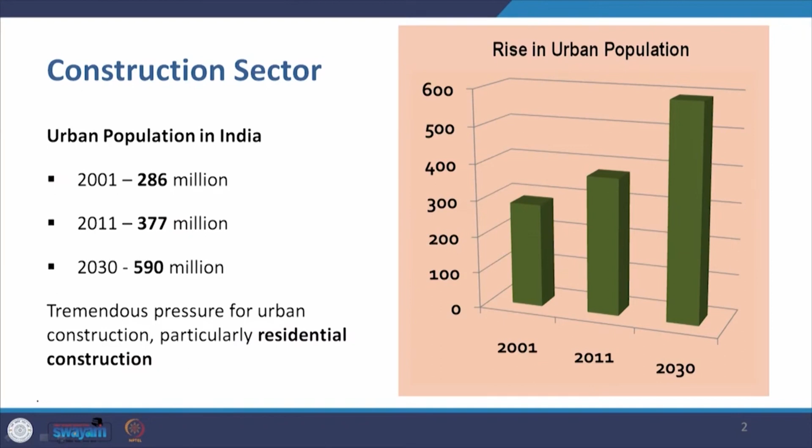The same thing happened from the time industrialization set in, that there was a movement from land to cities, to urban areas, and this momentum has only increased as time has passed. For example, in India, the urban population in 2001 was 286 million or 28.6 crore people, and this is going to shoot up to around 59 crore or 590 million people by 2030. There will be at that point approximately 40% of our population. Tremendous pressure is coming on urban construction, particularly residential construction.

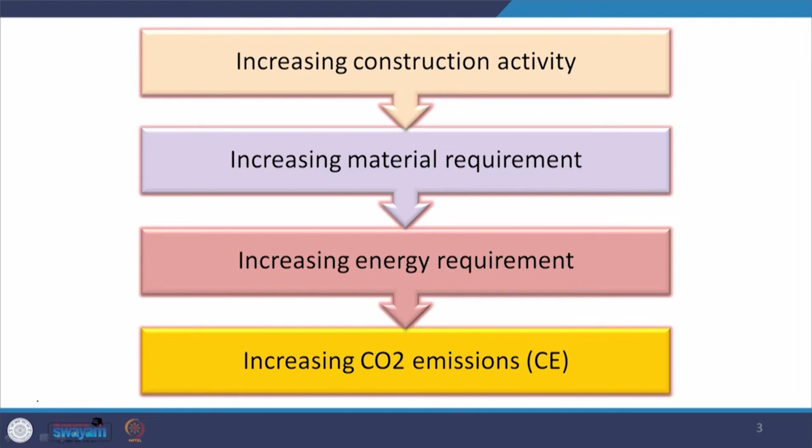It's obvious that increasing construction activity, though necessary for a growing economy like India, is going to lead to some repercussions. It will require increasing amounts of materials, that will require increasing energy to manufacture them, and that increasing energy will result in increasing carbon emissions because we use non-renewable resources like coal to produce the energy needed to manufacture the materials.

As a result, because this is a global impact, not only happening in India but all over the world in both industrialized and industrializing nations, carbon emission rise will lead to rise in global warming. It is said that if there is a 1.5 degree centigrade rise in temperature from pre-industrial levels, that very point when the Industrial Revolution began, if the temperature rises globally by 1.5 degrees Celsius, there will be a near irreversible change in our climate system.

Now you might think that this is doable, we can control it, but please understand the real problem. Recently you might have heard of COP26, and around that time the UN came up with a report and declared what is called code red, meaning that the global temperature is likely to rise by 1.5 degrees Celsius in the next 20 years. This totally throws out the window the 1.5 degrees Celsius pre-industrial level rise, because this is way too much.

The impact is going to be extreme heat waves, drought, flooding, melting glaciers, rising sea levels, and this is already happening. There have been floods in Germany that I've never heard of before. Recently there have been massive floods in Pakistan, in regions that normally have never really seen that level of flooding.

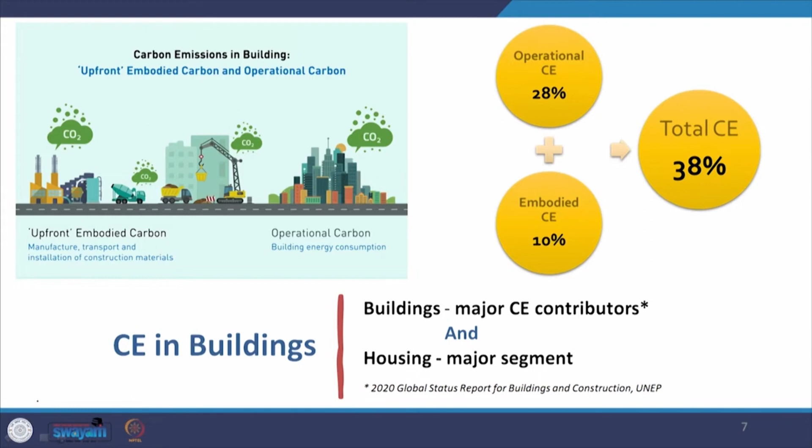The second is operating carbon emission that happens as a result of operating the building - air conditioning, heating, digital equipment, lighting, all electrical fixtures, etc. The total carbon emissions from both these works out to be 38%, about 28% from operational and about 10% from embodied. This figure has come up in the 2020 Global Status Report by United Nations Environment Program.

Therefore, both embodied and operating carbon have to be targeted in order to reduce carbon emission. I personally work in the area of embodied carbon, but there are a whole lot of people focusing a lot of attention on operating carbon. In this presentation, we will focus on the reduction of operational energy and thus operating carbon.

There is sometimes an overlap in the usage of the term sustainable and green - sustainable building and green building. Of course there is an overlap, but green building happens to be a subset of sustainable building. A sustainable building or environment includes environmental, social, and economic sustainability, whereas green buildings primarily focus on environmental sustainability.

Sustainability talks about three things: acceptability, equitability, and viability of whatever technology we are trying to use - for the sake of environment, for the sake of people in general and the social responses, how we can prevent damage to the social structure, and how it can be economically profitable, because any venture we take up to bring about sustainability must be an economically viable model.

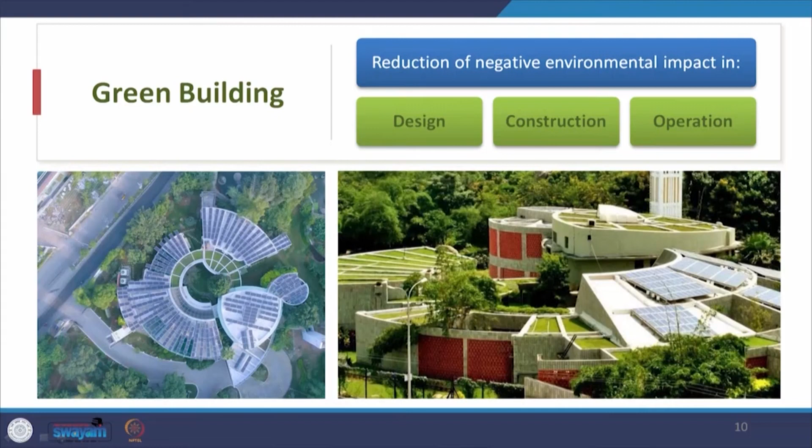Green buildings are focused on 3 important things, the SDGs linked with it. We focus on reducing the negative environmental impact through design, construction, and operation of the building. The picture you see here is that of the first platinum rated green building in India, and continues to be one of the greenest buildings in India - the CII-Godrej GBC building in Hyderabad. It was designed by Karan Grover.

Now, the green buildings - to use a simple term, I'll use the word climate responsive buildings, because green talks about many more things. It talks about water efficiency and resource efficiency, etc. Because all of it forms the ambit of environmental sustainability, my focus is going to be on energy and the reduction of energy we can do through buildings, thus leading to reduction in carbon emissions.

Why do we need climate responsive buildings or energy efficient buildings? In the earlier days, as I've talked about when discussing critical regional buildings, I had repeatedly mentioned that climate is one factor no architect working in India can ever neglect. It could not be neglected by the people who came earlier than the modern times, earlier than even the British, the Mughals. All of them had to factor climate into their buildings.

The British had to do that - Lutyens and Baker had to do that, and other British architects had to do that. Corbusier and Louis Kahn had to do that, and then Indian architects who followed them with modernism, they also had to do that.

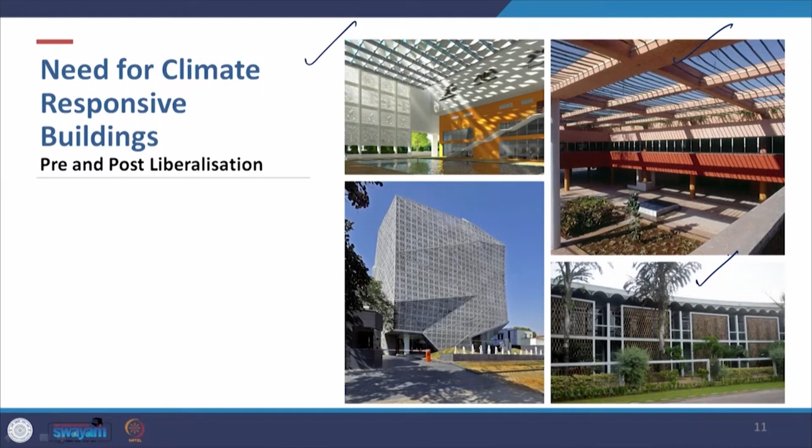Let's look at a couple of examples. This is Kala Academy—Charles Correa did this building in Goa, an empirical design of pergolas for shading. But in the British School, designed by Morphogenesis, the pergola has been designed computationally. This is much more efficient and mathematically correct in terms of shading and comfort it provides. Similarly, the Jali work we saw at India International Centre, the case study by Stein, is very efficient for thermal comfort—it lets wind blow in faster because of smaller apertures, increasing wind velocity and providing cool breeze into the building.

The accordion doors open up. You can look back on the slides, I told you that, and how the entire room turns into a deep veranda, etc. Now, the same concept applied by Sanjay Puri in 72 Screens, a building we'll study, is again done computationally, which is a far more efficient Jali, but it's a modern Jali.

So what has really happened is it's an amazingly wonderful marriage of traditional systems and modern technology. And that is producing the modern times critical regional building, the critical regional buildings of the 21st century.

Sanjay Puri is one of those people driving that change. He was born in '65, graduated from the Academy of Architecture in '88, apprenticed with Hafeez Contractor, and started his self-practice in 1992. He promotes innovative design solutions that are contributing to sustainability and spaces that are meant to revolutionize the way we experience them.

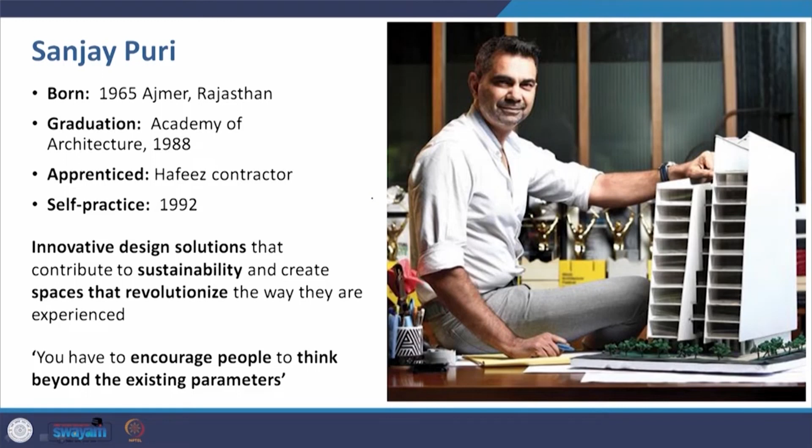He says you have to encourage people to think beyond the existing parameters, and so he has done very interesting and iconic buildings which are coming up in housing, office buildings, retail, entertainment, and private houses.

One of the houses that he did in 2011 was a courtyard house, a very famous house done in Ajmer by Sanjay Puri. Now, this picture shows you the difference between a modern Indian courtyard house and a traditional courtyard house, a Kerala courtyard house for example.

And this is a vernacular space interpreted for the modern house. The principle is the same, but the idea is interpreted in terms of modern architecture.

And that is why it is so important for us to focus on traditional knowledge systems, not to neglect them. That knowledge that has evolved, that our forefathers picked up over centuries of learning in a particular region through hit and trial, experiences, etc., is a vast source of information of principles and concepts that can be applied in modern houses. For example, let me give you an example.

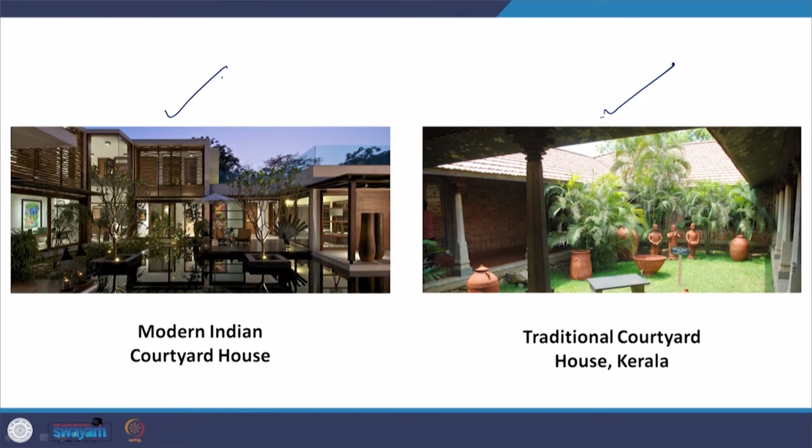Classical architecture, Greek architecture, talks to us about classical symmetry. Now, classical symmetry is a principle. It is not just there for the Greek temples. Any building can adopt a classical symmetry, and it has been adopted widely by so many architects. So that is one way in which we can just pick the principles and adapt them to modern buildings.

Now, in the courtyard house in Ajmer, Sanjay Puri does one thing very differently, and that is the rooms are not inward facing towards an internal courtyard, the rooms are outward facing towards the landscape. So here if you see, this is a standard courtyard where all the rooms are looking into the internal courtyard, but here in his house, as you can see in this model, all the rooms are facing away from the internal courtyard.

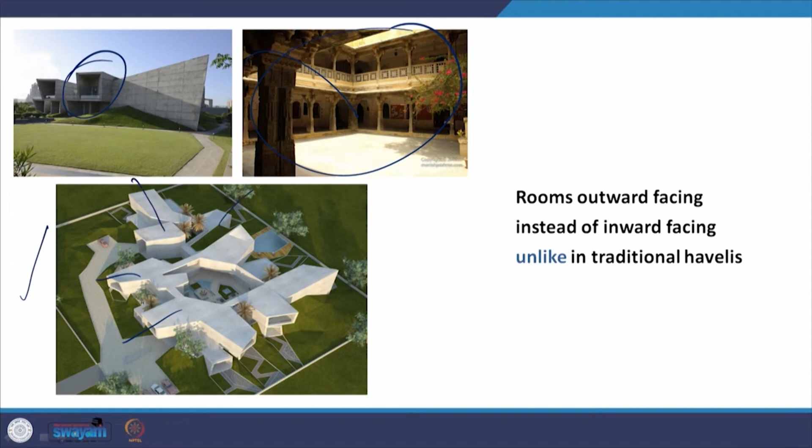Now if I compare his house with a very vernacular courtyard house, this is an example from Udaipur, having a central courtyard and smaller courtyards. So this is a 3000 square meter house, the courtyard house, and it is planned around the central courtyard, and then there are smaller courtyards spread throughout, and there are also small water bodies around the courtyard. Very simple principles of green and blue infrastructure to cool the building and keep it thermally comfortable.

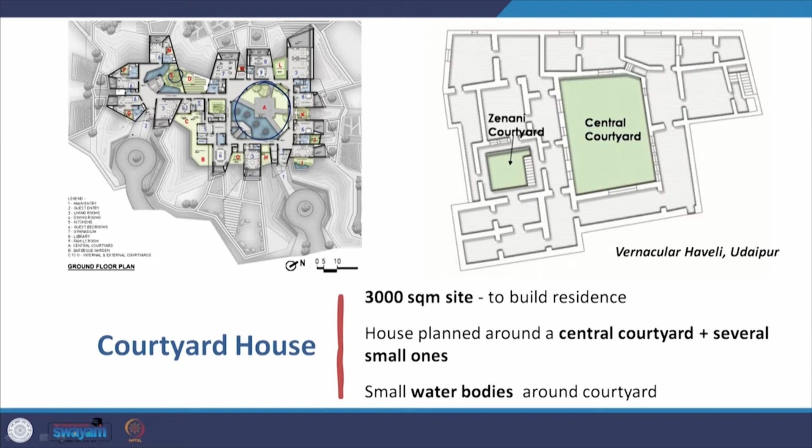So this picture indicates the approach, and this picture indicates the composition of the variously proportioned concrete volumes, and they are amazing. Architecture in its form and aesthetics is not neglected in technology. That is a statement I mentioned earlier to you, that science is not leading to bad buildings, bad aesthetical design, bad aesthetics in buildings. In fact, it is contributing to better aesthetics, because we can do with our buildings things that would not have been possible before.

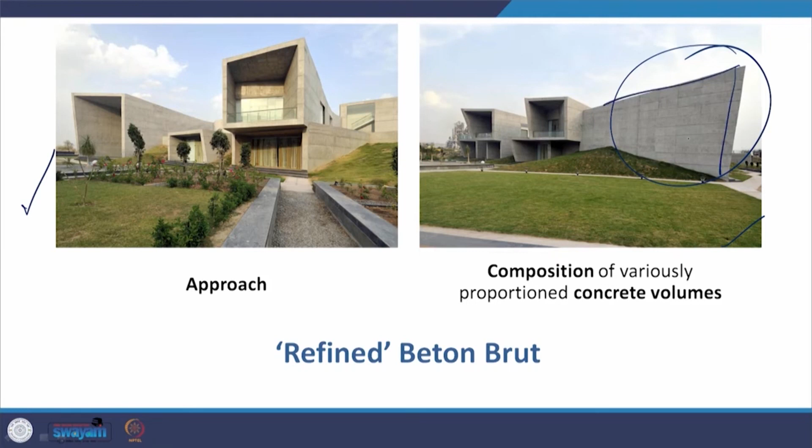So here in this building, for example, this is on a monumental scale, and within this one double height room is accommodated two floors at the rear of the house. So this is an amazing form that he has generated out of refined beton brut. Here it is the views of the landscape from all sides, and it seems as if the house is growing out of the ground, and it is a fortress-like mass.

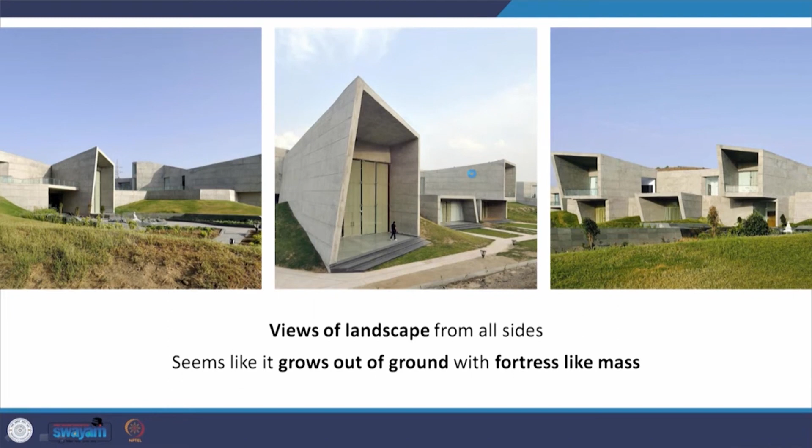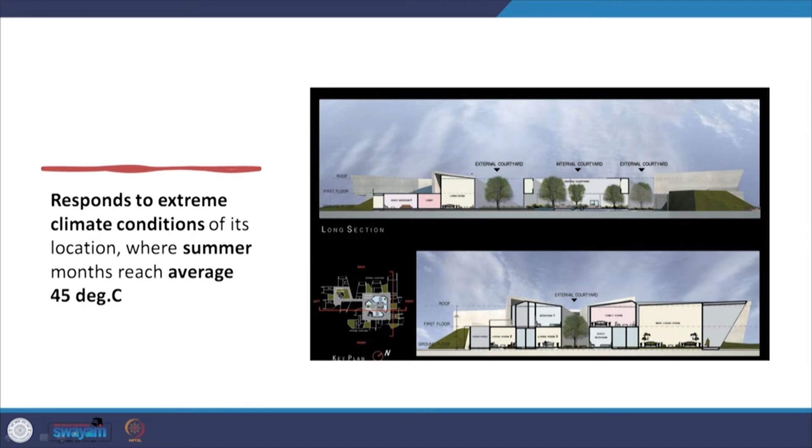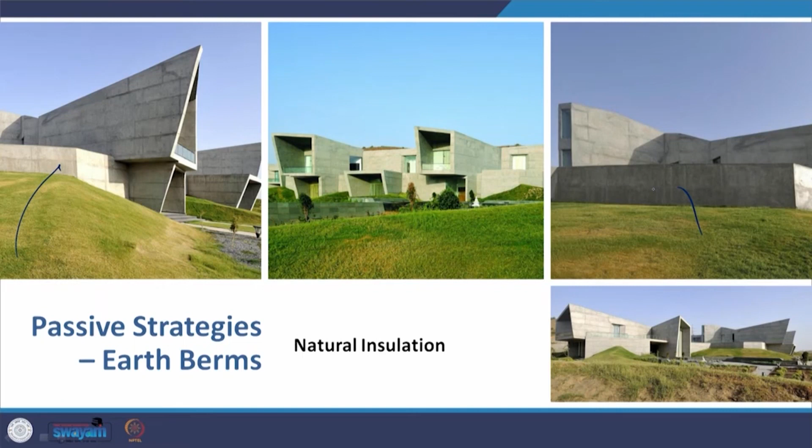Now it responds to extreme climatic conditions of its location, that is Ajmer, where summer month temperatures can rise up to an average of 45 degrees Celsius. So the passive strategies that he employs are, one is earth berming. So by providing these earth berms on the side of the house, he provides natural insulation of the earth. In the ground floor, for example, most of the spaces are linked to the internal courtyard and smaller open air spaces, smaller courtyards, and he also creates this integration with the greenery into the house.

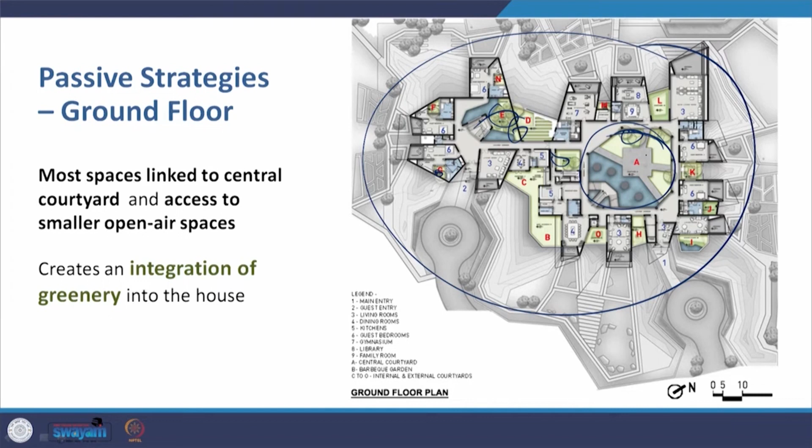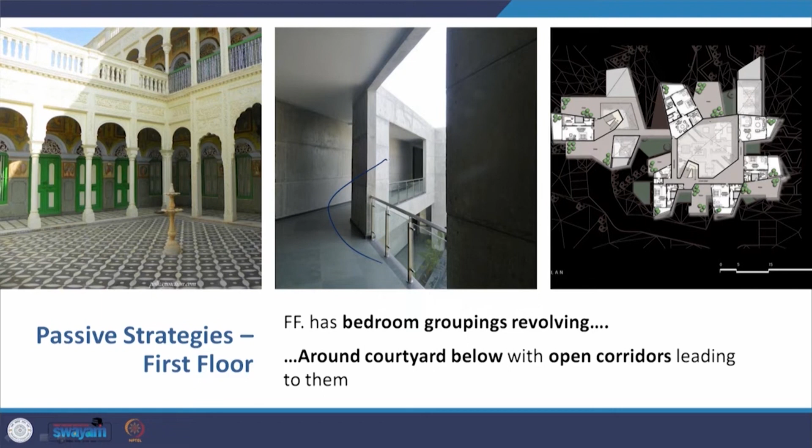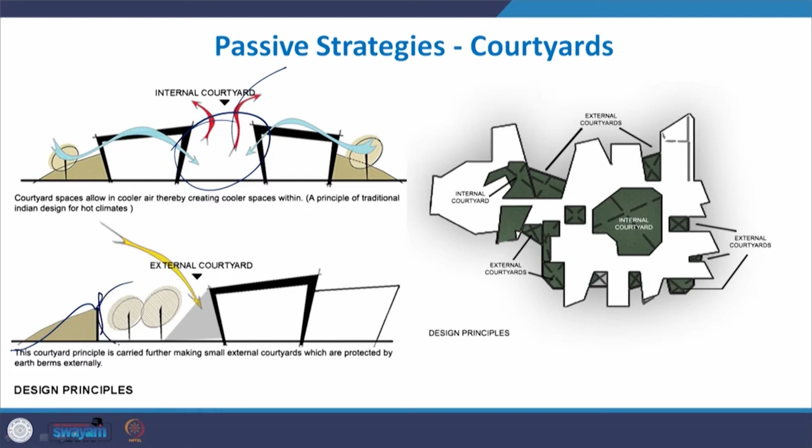So there is greenery all around, and greenery within the house too, spread throughout in smaller and bigger courtyard spaces. On the first floor, the bedroom groupings revolve around the internal courtyard, with an open corridor leading to these bedrooms, and this courtyard connects them all. This is how the cooling effect of the courtyard takes shape: cool air moves in, hot air rises and cools the place. He does the same thing outside too - because of the earth berm, it acts like one of the walls of a courtyard, so this space functions very similar to an internal courtyard.

Then he talks about shade and shadow. This shows how shade and shadow impact the building in summer, morning and evening, and in winter, morning and evening. Keeping aside winter, since that isn't as important, in summer you can see at a particular moment of the day how much of the house is mutually shaded by its own form, and how much shade is available.

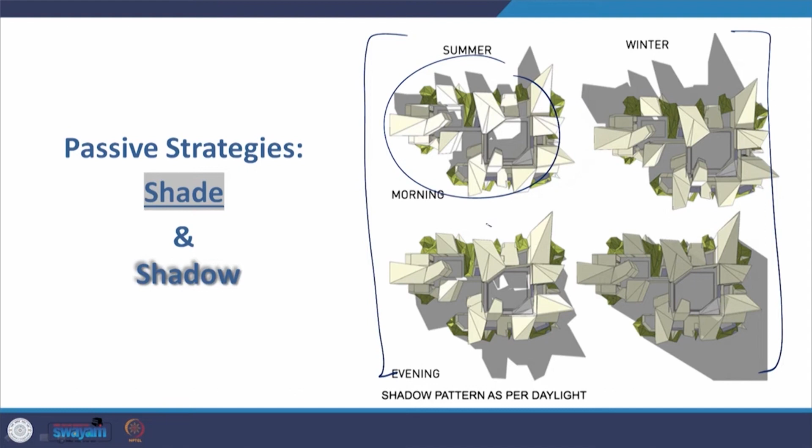Then the gardens are protected with privacy created because of the earth berms. So the earth berms are not only serving the function of providing natural insulation, they are also providing greater privacy to the occupants.

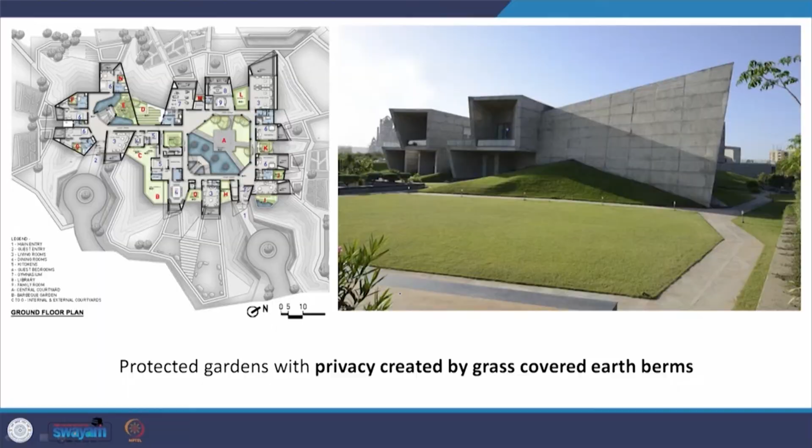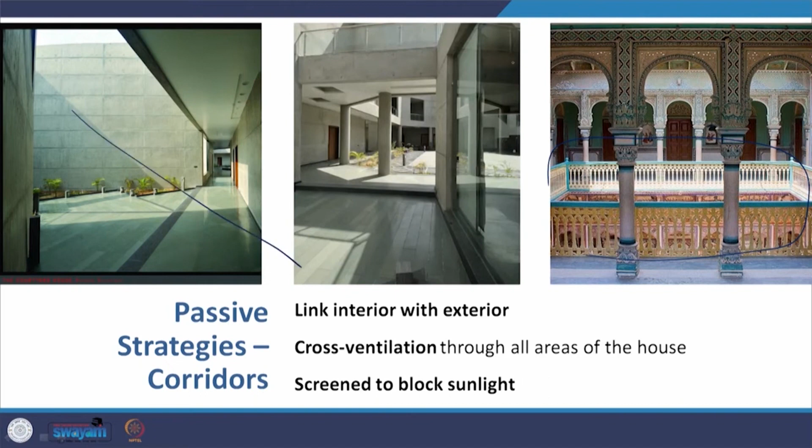Then there is the passive strategy of the corridors themselves. They link the interior with the exterior and provide cross ventilation to all areas of the house, just as would happen in a standard corridor in a courtyard house. They are screened to block out the glare of the sun, allowing diffuse light to enter the interior spaces of the house.

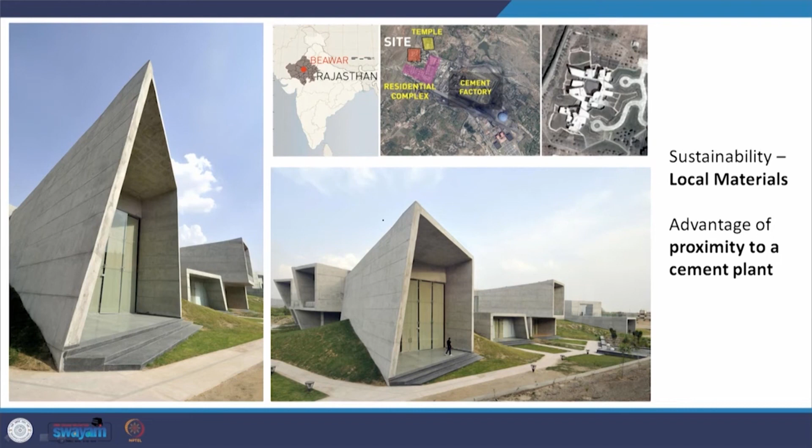Now, sustainability comes through the use of local materials, which is common in green buildings - materials have to be sourced within a particular diameter of the project. Here, the advantage is that he is using exposed concrete, and the house is in close proximity to a cement plant, so the massive amount of cement required to build this big house could easily be sourced from there.

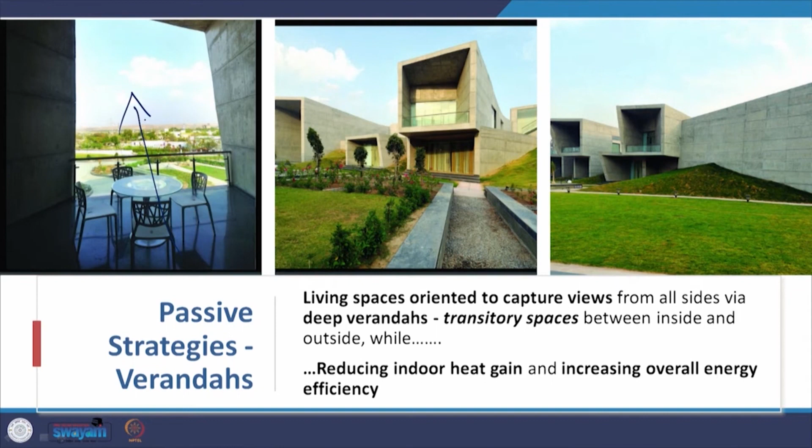Now the verandas - the living spaces are oriented to capture views from all sides via these deep verandas. This is the veranda looking out towards the outer areas, serving as a transitory space between inside and outside, providing a barrier as you move from outside. Then there is the veranda leading into the room, reducing indoor heat gain and increasing overall energy efficiency, because reducing heat gain reduces air conditioning loads, which increases energy efficiency.

Now, in conclusion, the passive strategies for the house are that the concrete structure itself works as a thermal mass, retaining heat within itself during the daytime, and at night, in the desert climate when it becomes colder, it releases the heat to make it comfortable. The principle of the traditional Indian courtyard house to tackle heat and create a cooler environment with cross ventilation is present throughout, along with increased privacy and provision of shade for the occupants.

I've been through it in a very summarized manner. You can study this in great detail - it's available online and in literature.

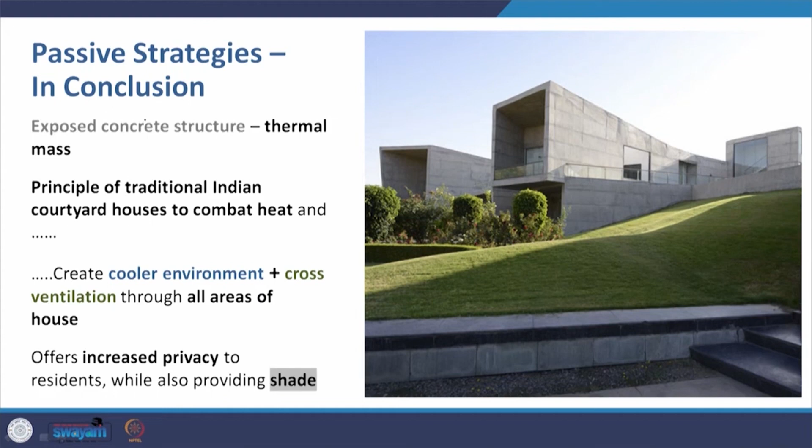This shows how principles of traditional courtyard houses of Rajasthan have been applied here. When you look at the house, it doesn't at all seem like a traditional dwelling - it is totally brutalist, a refined Beton Brut house. But when you look at it closely, you start seeing the traditional principles behind it.

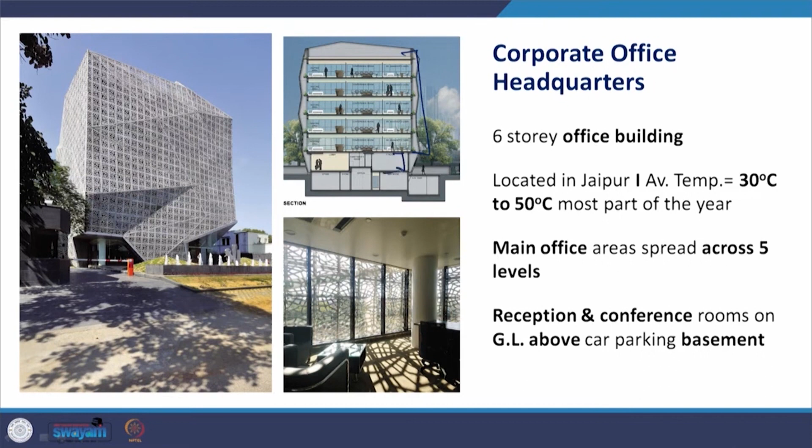Then there is the 72 Screens project by him in Jaipur, 2013. This is a corporate office headquarters, six stories high, located in Jaipur, where average temperatures go from 30 to 50 degrees Celsius most of the year. The main office areas are spread across 5 levels, with the ground level below that, and basement car parking underneath. The primary focus of the design was to minimize heat gain. These case studies - the first one being the courtyard house - are both in the hot and dry climate belt of India.

So here what he does is he blocks the southern facade from where the heat would penetrate. And how he does that is he provides the services on the south side. He provides the pantry, the gents' toilet, the staircase, the lift, etc. on the south side and blocks it.

And thus, not only that, the columns are on the periphery, and thus the internal workspace is completely flexible. And there are glass reinforced concrete jalis all around the building, in an abstract angular geometry to filter out the heat. Now, one question will arise in our mind: why the south side?

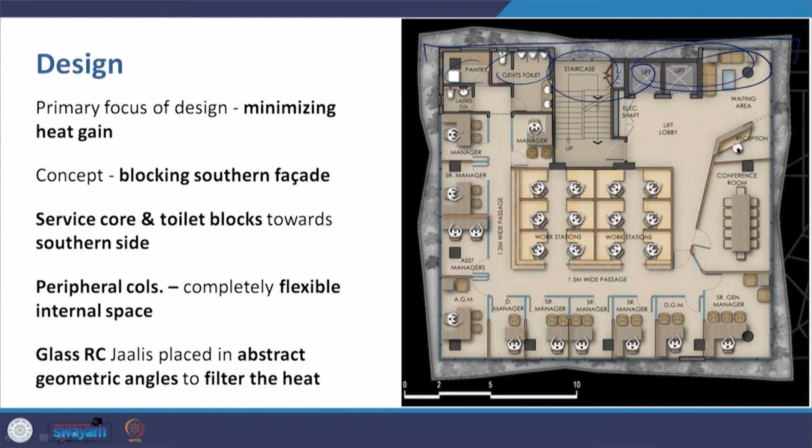It should be the west side. We've always been taught the west should be kept like a blank wall, no fenestrations. He should have provided the services on the west side. Why doesn't he do that? Because it's an office building, and this is what happens.

Now please understand this: in the evening the office mostly will shut off, people will go back home, the work time for most people will be over. It is during this time when we require maximum thermal comfort that we want to keep out the heat gain from this side, the southern side, when the work day is at its peak. And this is what it is doing.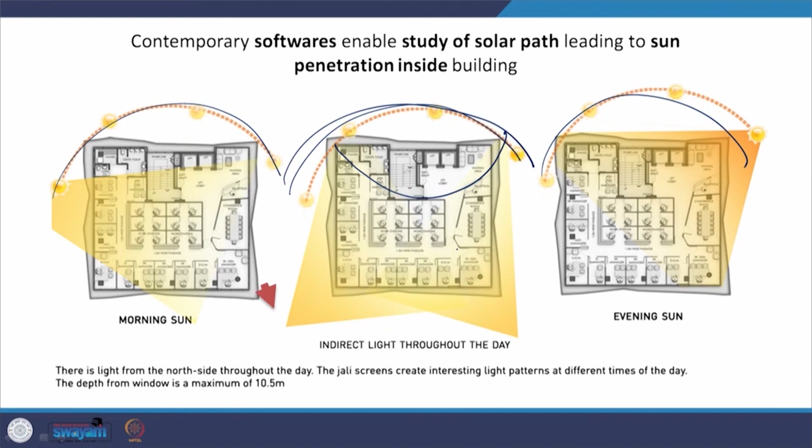Now, the glass RC jali envelopes around the building, and it is a direct derivation of the jalis of Rajasthan, inspired from them. So this is the jali, the way it's been used in a Rajasthan Haveli. This is how it is.

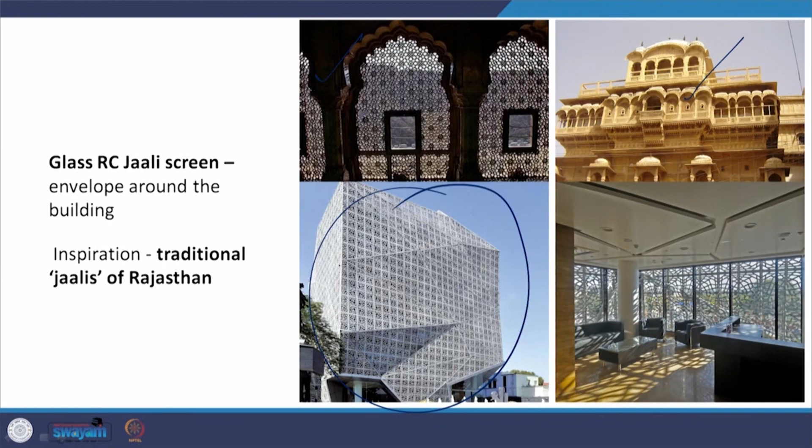And so this is the computationally derived jali in glass reinforced concrete. And this is the sciography it is creating within the building. It is an abstract folded plane mounted on a steel framework, as you can see here.

It was designed and assembled using computer technology, and it is an important climate responsive feature of this building, thus preventing heat gain from all sides and also increasing ventilation, because the wind flows through the jali and that increases velocity, and thus that is good breeze that penetrates into the building.

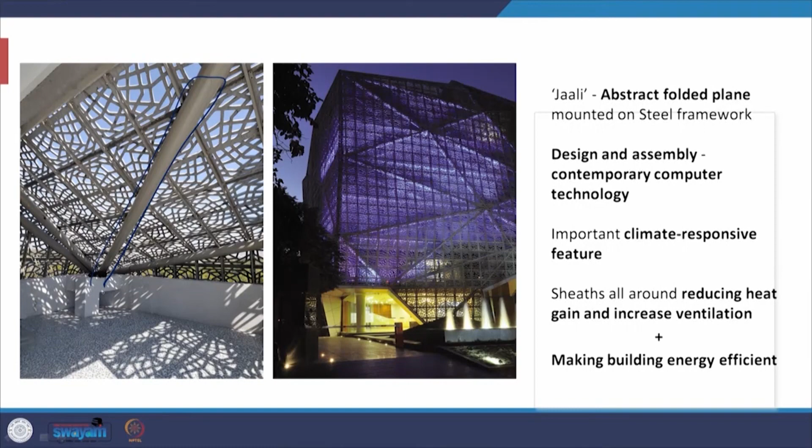Because of the jali, the building becomes energy efficient due to reduction of heat load. Also, it provides better daylighting without the glare, and so that reduces the lighting load also.

Now, here is how the cooling of the building works, the cool air penetrating into the building. The other thing that happens is that between the jali and the interior of the building, they have provided plants within that space, and that also serves to create cooler office spaces.

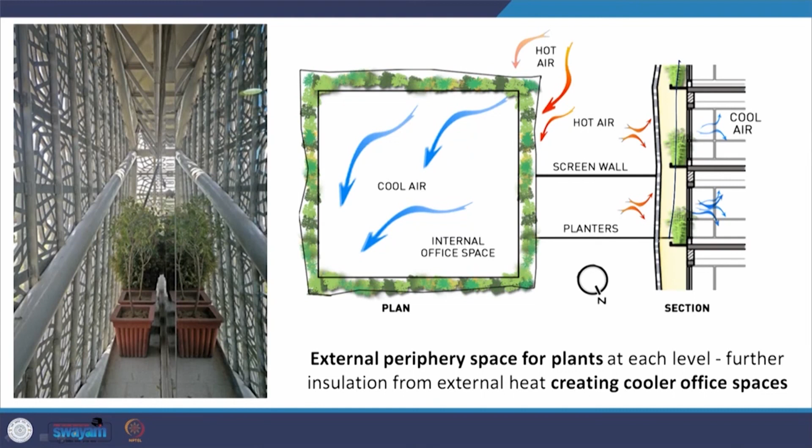So the screen creates this pleasing ambience with the sun streaming through, and this is a kaleidoscopic sciography that happens within the building. Now, the architect does not neglect the architectural or the aesthetic component.

The trapezoidal planar geometry that is reflected in the glass RC jali work continues in the interior, in the ceiling, in the counter that has been created for the receptionist, and in the layout of the furniture within. So the trapezoidal geometry is consistent throughout the building.

It is very similar to the way in which F.L. Wright used to use geometry. He would build the entire project on one geometry. If it was triangles or pentagons or hexagons, the entire geometry would be built around that polygonal shape.

So this presentation primarily focused on why there is such a great need of climate responsiveness today, because of the need to reduce carbon emissions, and also the great advantage that technology is giving us today to modernize or use traditional systems in a much more efficient way in the buildings of today.

In the next presentation, I'll take you through some more studies, and we will look at how other architects are responding in other climatic regions. Thank you.